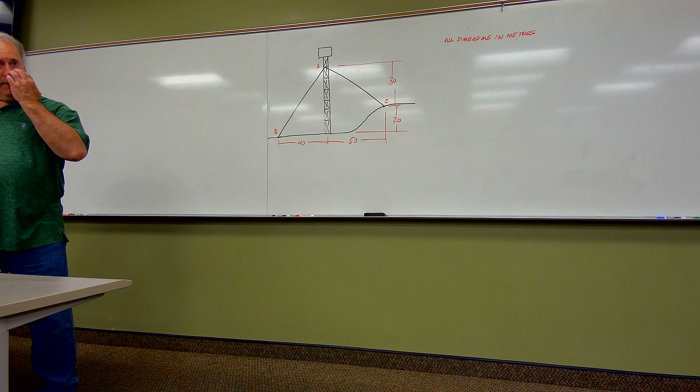And I'll also remind you that right now we're limiting ourselves in our conversations to 2D force systems, which again, if you're going to take some time, I encourage you to do so. Take some time to go through Chapter 2 in your book. Skip your sections involving 3D. There's nothing there that we need to dig into right away.

But when it comes to spending any time in Chapter 2, I want to be crystal clear when I say this. As I said to everybody at the very beginning of the course, the job at hand for all of us in the very few weeks that we really have together for this course is to really get good at some fundamentals, and then the details will come in time. I want to make sure that you all understand that doesn't mean that we shouldn't be looking at the details. It means we don't need to make them part of everything we do.

But if you're going to spend some time going through Chapter 2, I just want to encourage you to not only look for the things that we're covering in class, because those are the fundamentals, obviously, but the depth of knowledge that you get by reading about some of the details, some of the little things that we're not going to cover, because once again, we can't possibly cover everything. So understand that when I suggest going through the chapters, what I'm really saying is invest that time in yourself to get at least some exposure to those details so you can see how they dovetail with the fundamentals that we're covering here in class.

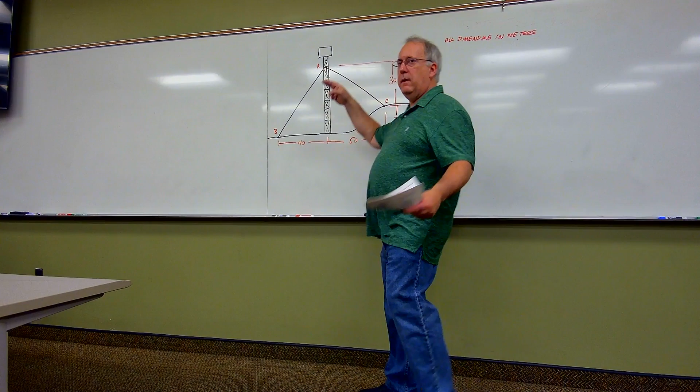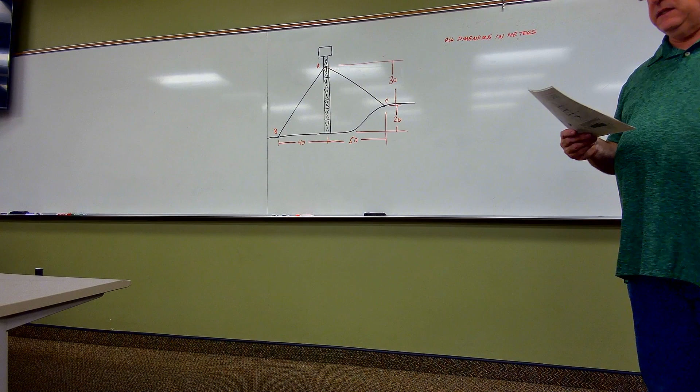The guy cables AB and AC. So we're talking about these two cables right here. I'm 4 words into it and I've stopped. AC, AB. All right, we're talking about the so-called guy cables. The guy cables AB, AC are attached to the top of the transmission tower. Now, hear this word I'm about to emphasize. The tension in cable AB is 8 kilonewtons. Tension. Very important idea here, folks. Cables are among the few things that we're going to look at here in statics that are not rigid body elements.

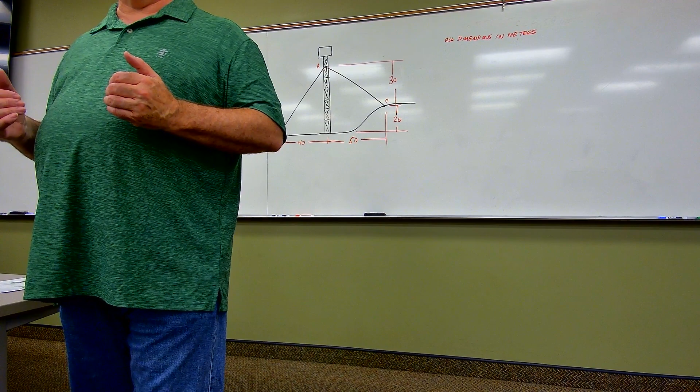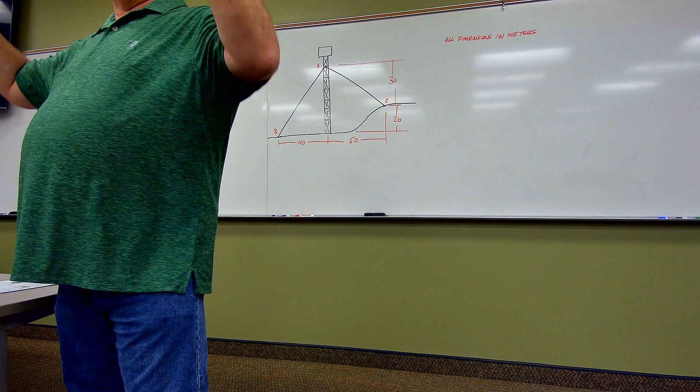All right? Take this tabletop right here, for example. We view the tabletop as a rigid body. I can't compress it. I can't extend it. I can't fold it, I can't make it smile at me, it's a rigid body. On the other hand, if I had a cable attached to the table, or a chain, or a belt, something like that.

Yeah, questions? Is that 8 kilonewtons? Yeah, 8 kilonewtons, yep, 8 kilonewtons.

If I had a cable, so imagine this, I got a chunk of rope in my hand right here. I'm going to attach the rope through this hole in this table right here. Now, y'all know, this is all about imparting forces onto mechanical systems. So, one end of my rope is tied into that hole in that table right there. I'm holding the other end right now, and I want to use this rope to impart a force on the table that's going that way. Can I do it? Nope. Why? Not a rigid body.

So if I really had a rope here, I'm holding it, there's not a whole lot of slack in the rope right here, kind of holding it tight, and I want to use this to push the table that way. All that's going to happen is if I move the rope this way, the rope's just going to do this, and the table does what? Nothing, right? Well, if we want to formalize that idea, what that means is I can't use a non-rigid member to apply a compressive force.

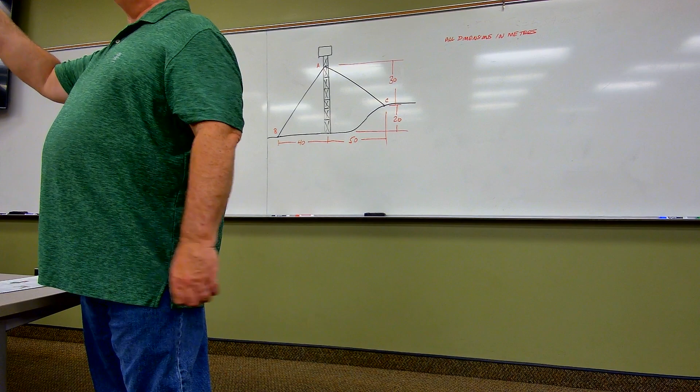I took my same rope right here. I want to compress the table. I want to squeeze it together. I can't take my rope and push down on it and squeeze the table together. No can do. On the other hand, that same rope tied in here, if I want to impart a force that's going to go this way towards that wall over there with my rope, now I can do that. Why? Because in the non-rigid member, I can impart tension forces.

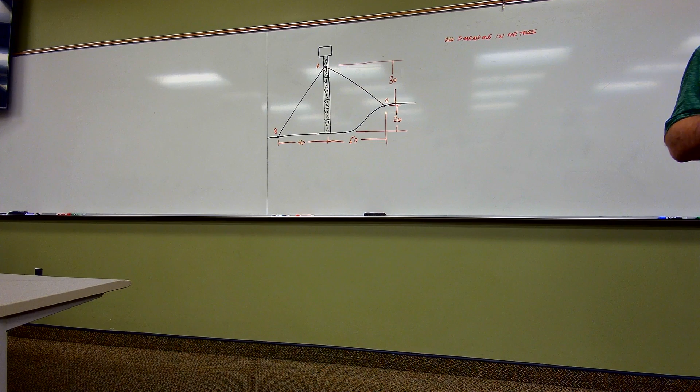If I had an open hand here and I pull on that like there, I face resistance to motion. On the other hand, if I do this, I face no resistance, or effectively no resistance to motion. No compressive forces, but yes, tension forces. So what we just saw in the wording of this narrative, when it said the tension in cable AB is 8 kilonewtons, that is telling us that we're going to treat the cable as a non-rigid body that can only impart tension forces. It can't compress, but it can pull. So the tension in cable AB is 8 kilonewtons.

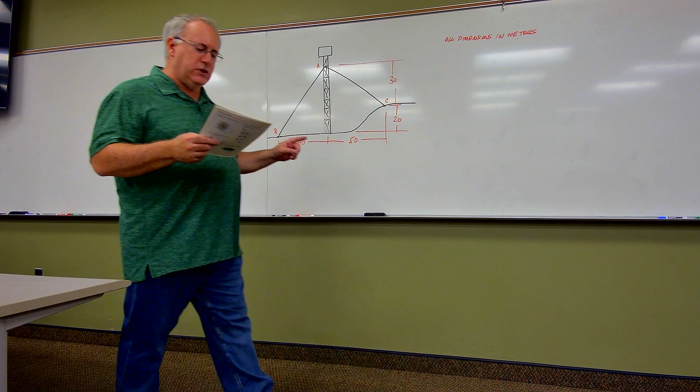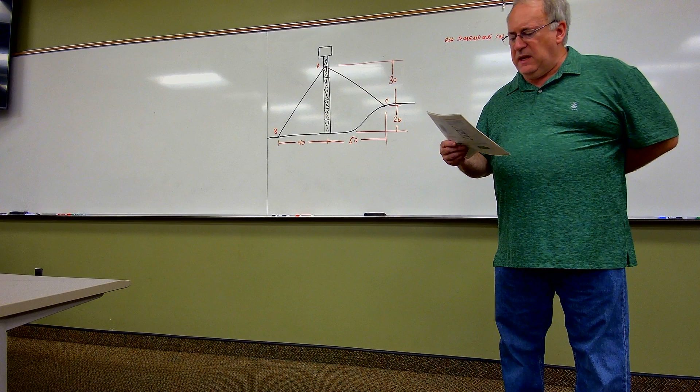The ask in the narrative goes like this: determine the required tension T in cable AC. So we're going to figure out how much tension force we need to put in that cable, such that the net effect, meaning combined effect, of the two cable tensions is a downward force at point A. And then we're asked to determine the magnitude of the resultant of that downward force. So let's break this up and make sure that we're crystal clear, because this part may seem trivial, but it's critical.

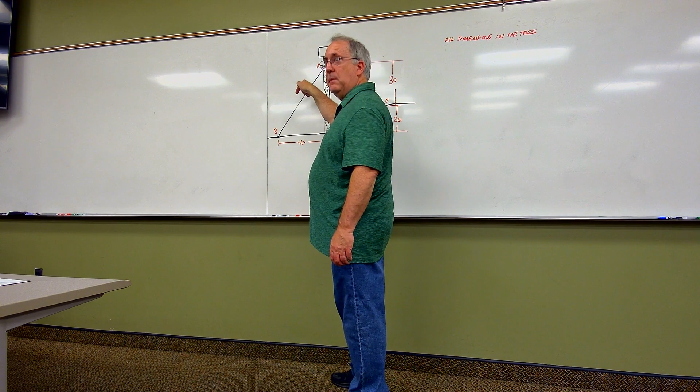We're taking the narrative, we want to understand what we're being asked to do. We know that there's an 8 kilonewton tension in this cable over here. We want to figure out how much tension we're going to get over here so that, I want to read these words one more time, quote, the net effect, the total effect of the two cable tensions is a downward force at point A.

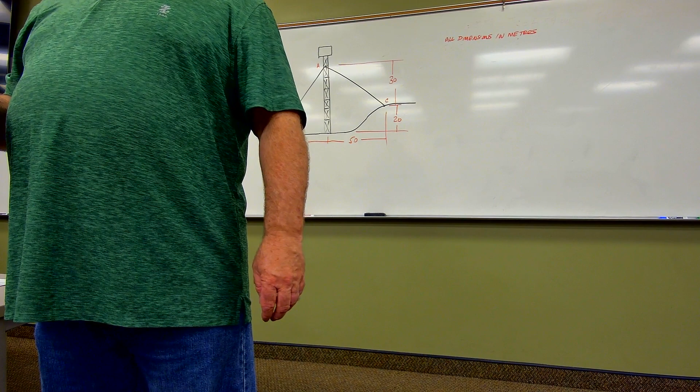What's implied in that is if the net effect is a downward force here, there is no horizontal force. If we think about the standard X-Y axis, we want to put a tension in cable AC so that it creates nothing but a Y direction force and, by extension, no X direction force. That's the key to understanding this problem. That's the key to solving this problem. So, okay, how do we do that? Well, if the game is figuring out what that unknown tension is, again, think about our model. We're going to read the narrative.

If we don't already have a graphic, we're going to create a graphic, but we've got a graphic, so step 1, step 2, done. But now we need to create a model. This also is going to be a visual model that we're going to use to create the math to solve the problem. For us, it's a free body diagram.

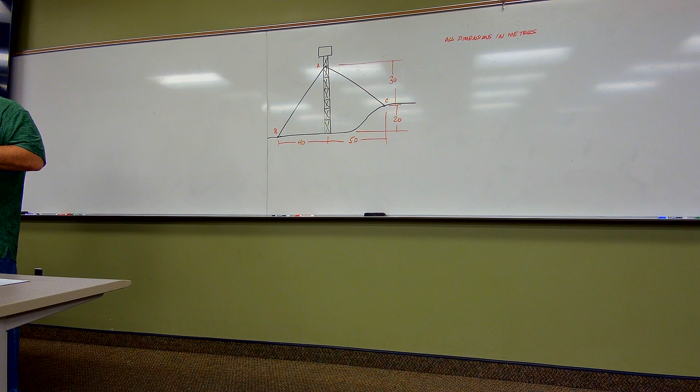Now, we haven't formalized any education yet in free body diagrams, but we've already seen how that's done. We pick something, we sketch that something, and then we draw in forces. If there are any applied forces, we put those there. If there's a weight, we put that there. And then we also include forces for where we used to be in contact with something. We put that there too.

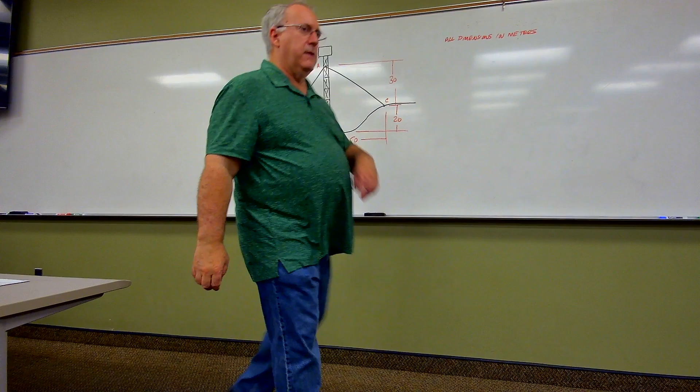So now we're gonna make a free body diagram of something over here. Was there any limitation at all on what you could do a free body diagram of? Like, yeah, you can do it on these things, but you can't do it on that. There wasn't any. There is absolutely nothing that we can't make a free body diagram of. Absolutely nothing.

So take, for example, let's say that I want to do a free body diagram of just a chunk of cable AB. Now, this is not to solve the problem, it's to make a point. Let's say I want to take that chunk right there. Step 1, draw the thing. There's my chunk of cable AB. We already know, according to the narrative of the problem, the cable AB has 8 kilonewtons of force, but we were told that that was a tension force, right?

It's a tension force. Now, as we talked about before, when we don't know the directionality of a force, we don't need to know its direction because the math will tell us what it is. But this is a different scenario. In this case, we know the direction because we're told it is a tension force, meaning the force in this cable is trying to pull this cable apart. It's not trying to compress it. So the 8 kilonewtons of force is going to be collinear with the cable itself.

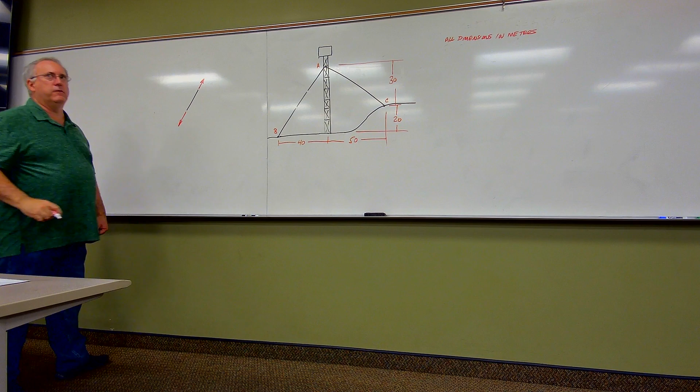This is another aspect of non-rigid bodies like cables and chains and wires. The force will always go along the line of action of the element itself, provided that gravity isn't acting upon it, and we'll talk about that in chapter 3. But for now, we know the forces in this are an 8 kilonewton force going that way. And remember, Newton's law, equal and opposite, so opposite direction down here, 8 kilonewtons going like so. That's the free body diagram of that chunk of cable AB.

So now, let's go back. We still want to solve the problem. We're going to draw a free body diagram of something that's going to allow us to solve this problem. There's a couple of great possibilities. One, maybe I could draw a free body diagram with just these two cables connected together, cut them, and draw my forces associated with the cables. Would that solve the problem? The answer is yeah, that'd do it. But there's an even easier play here yet.

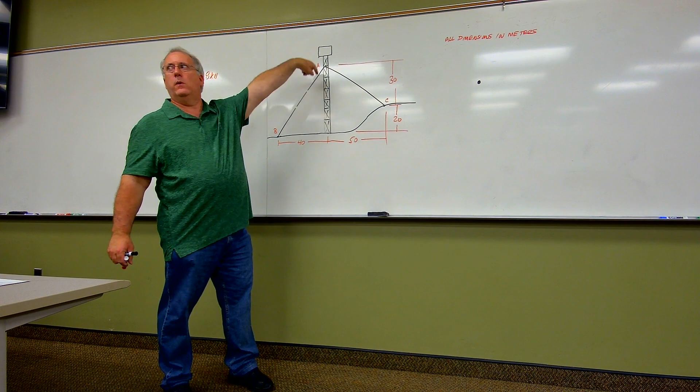If I can draw a free body diagram of anything, then why can't I just draw a free body diagram of the place where these two things are connected together? So my free body diagram is going to have the profoundly complicated artwork of here's where the two cables come together, like that. Now, some might say, isn't that attached to the tower? It is, but that's an attachment going in the Z direction, and our world is 2D right now, so we're not worried about that.

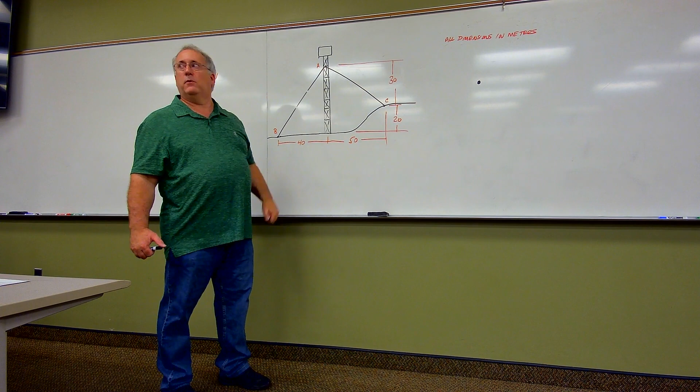But we do know this: coming off of this place where these two cables are connecting together, I have the force in this cable here, and I can draw that force going downward like so. In fact, I know that this is going to be 8 kilonewtons because I've already been told it's 8 kilonewtons.

And why did I draw that arrow down that way? Because, again, equal and opposite. If the cable is in tension and its force here, which ostensibly we could imagine is the place where it's connected to that dot over there, if the force in the cable is going that way, then according to Newton's law, the reaction force has got to be going in the equal and opposite sense. So we did that. Now, cable AC, we don't know the tension in it, right?

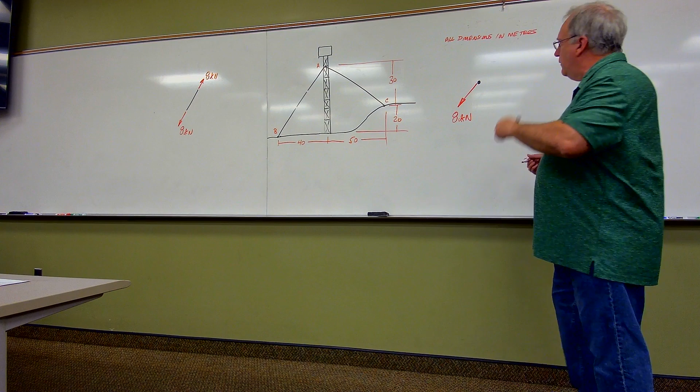But we also know that it's in tension. So therefore, we can draw this force that's going off like so. And let's call that something. Let's call it TAC maybe, for the tension in cable AC. And again, there's no limitation. Call it whatever you want. If you want to just call it AC, perfectly fine. If you want to call it my dog Spot, who cares? Just give it a name.

So now, with that, put this into perspective of how we are solving the problem. Narrative, graphic, now a model from which the math can come from. And in this model, let's not forget, we want to draw an axis system. So how about we do our axis system like this? There's our x-axis, and let's let our y-axis go like that. Does it matter that I drew it that way, folks? Does it make one iota of difference? No, not one bit. I could have just as easily come over here and done something like this and been just as happy with it and got the same result.

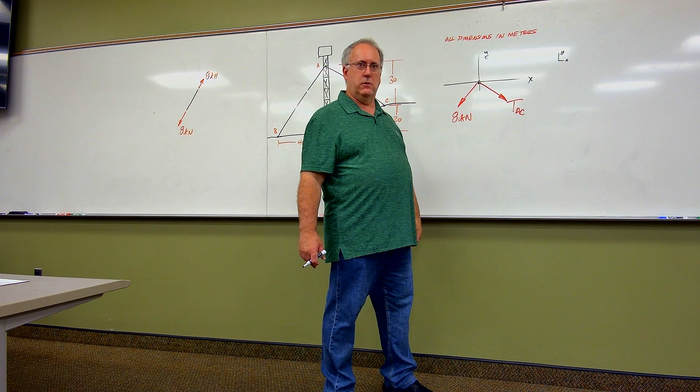But for reasons that will become apparent here in a second, I threw that in right there, because the next thing I need to understand is I'm going to need some kind of directionality. We talked about that the other day. Remember, if I want to be able to specify a force, which is a vector quantity, I need to know how much, direction, and point of application. In this case, the how much are these things, point of application here, and then the direction for a two-dimensional force system, we need one angle, right? So I need to get an angle.

Make sure I draw this thing, okay? I need to get an angle between the x-axis and this force here. I'm gonna call this angle beta. You get an angle between the x-axis and this force over here, and I'll call that alpha. And once again, I can call them whatever the heck I want to. So now I need those angles. If I get those angles, then I've got this thing figured out.

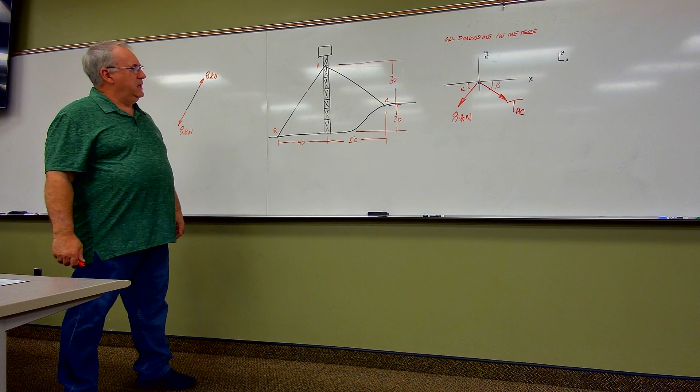To get them, now we're back to our original diagram, the original graphic image of the problem at hand. And remember, we've talked about this before, folks. We look for triangles, right? So for example, if I want to figure out what angle alpha is, I see a triangle right here that I can create, which involves a leg going up like this, a leg going over like this, and here's my angle alpha. Now, let me presume that that is a right triangle. We've got dimensions given to us. This dimension from here to here is 40, which means this leg of the triangle is also 40. This dimension from here up to here must be the combination of this 20 plus this 30, so I got a 50 over here.

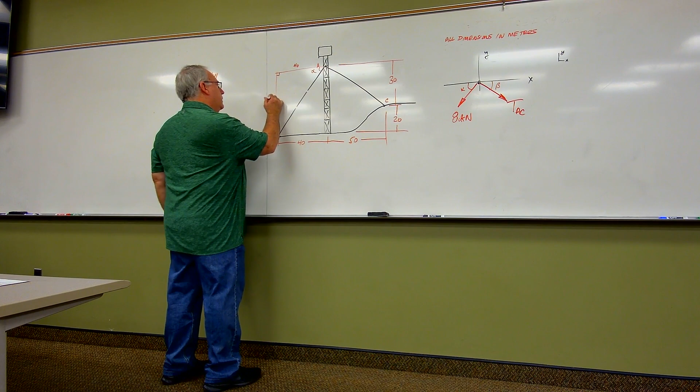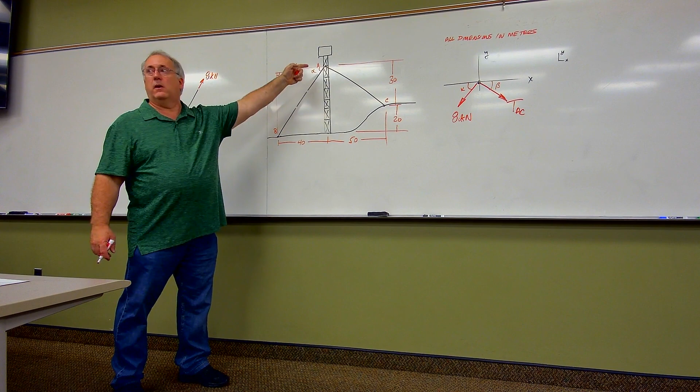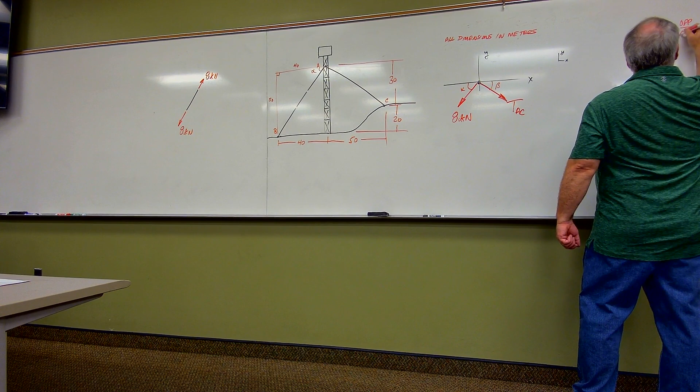And therefore, with respect to the way I define angle alpha, I know the opposite leg of the triangle, I know the adjacent leg of the triangle, and opposite and adjacent, that's tangent, right? So therefore, the tangent of alpha would be opposite over adjacent, and that would be, in this case, 50 divided by 40, which means that alpha would be the inverse tangent of 50 over 40, or 1.25. And folks, if we plug that in and crank that all out, we're going to find out that alpha ends up being 51.34 degrees.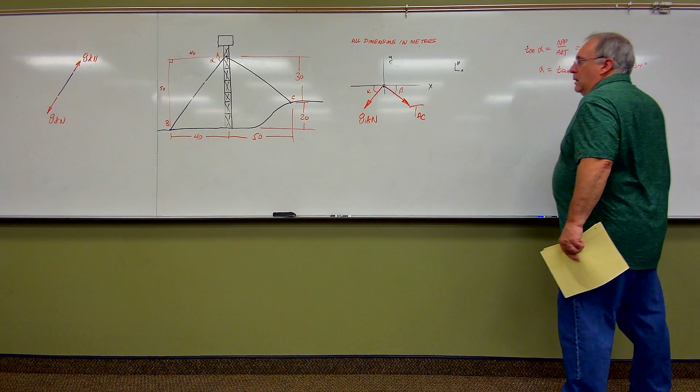And then we got beta to deal with. Now, same thing, look for triangles, right? In this case, easy to see, you've got a triangle right here, going down to here. We know this leg of this triangle is going to be 30. We know that this leg over here is going to be 50. Here's our beta angle. So got opposite, got adjacent. So the tangent of beta, which again is opposite over adjacent, is going to be equal to 30 divided by 50, or 0.6, and therefore beta is the inverse tangent of 0.6. And folks, when you plug that in and crank that out, you're going to find out that beta ends up being about 30.96 degrees.

So now with that, I've got more information that I can add to my diagram that I'm using to get my math. Remember, we've talked about this too. Whenever you know the value of something, make sure that shows up on your model. Anything short of that means you're adding an unknown that is not still really an unknown.

So right now I know that this is 30.96 degrees. And I know my alpha over here is 51.34 degrees. And we are in great shape.

Now, folks, you all know too, as we're going through this, if there's anything that's not crystal clear or that I'm overlooking, don't hesitate. Shout it all out. I assume, since I'm not hearing anything, that everybody's good at the moment, but again, if you got any questions, fire away.

So now where do we go? Well, we've already seen the end. We know that this is all about equations of equilibrium. Summing forces in the x direction, summing forces in the y direction, right? The other day, and even when we were working the problem with the can crusher, we saw the value of resolving forces in their x and y components. I'm going to do the exact same thing here, folks. The next step, now that we've got our model, is I want to resolve my forces. So let's resolve forces. And I can kind of sketch them onto my model over here.

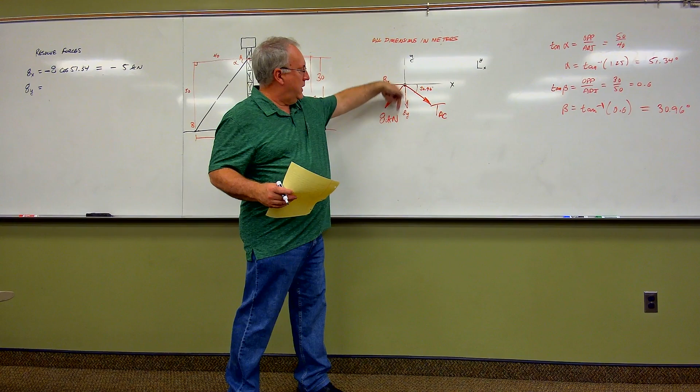Then my B component going down the y direction, y'all take a look at that, make sure we see this. Is that gonna be a positive, or is that gonna be a negative? How many of you are gonna go with negative? Good, all hands should be flying right now, because if that's showing model-wise positive y that way, that's going down that way, it's gonna be negative, so it's gonna be -8 times the sine of our angle, 51.34 here. And folks, we plug that in and crank that one out, we're gonna find that ends up being -6.25 kilonewtons, and we got that one knocked out.

Let's also resolve TAC. So TAC is going to have an x component going off this way. So there's TAC, we'll call this one TAC sub x. And a y component, it's tending towards negative here, so down going that way, so call that one TAC sub y.

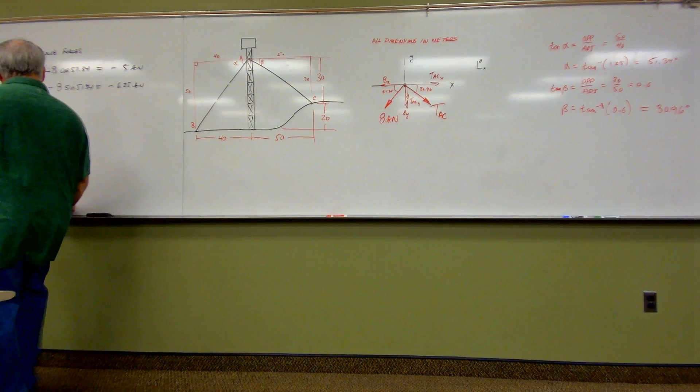So over here, TAC sub X is going to be, and once again, see the triangle here, folks. Can't say this enough. So here's our triangle going down like this. We're looking for that leg right there, TAC sub X. So I've got the hypotenuse, my angle, that's the adjacent, so it's going to be the hypotenuse times the cosine of 30.96. So TACX is going to be TAC cosine 30.96.

Since I don't know what TAC is, that's as far as I can go with that. TACY, and by the way, that TACX was tending towards positive X, so therefore it's a positive number. But TACY, as we all should be able to see, is tending towards negative here, so that's going to be minus again. So that's going to be equal to minus TAC times, in this case, the sine of 30.96.

And then, just like that, now we've got our forces resolved into our X and Y components. And what's important here is this puts us in position now to solve the problem. If you think about the sequence we just did: narrative, graphic, model, from which the math comes. We're in the middle of the math part right now. Now let's solve the problem. In this case, we just have to understand what was being asked of us.

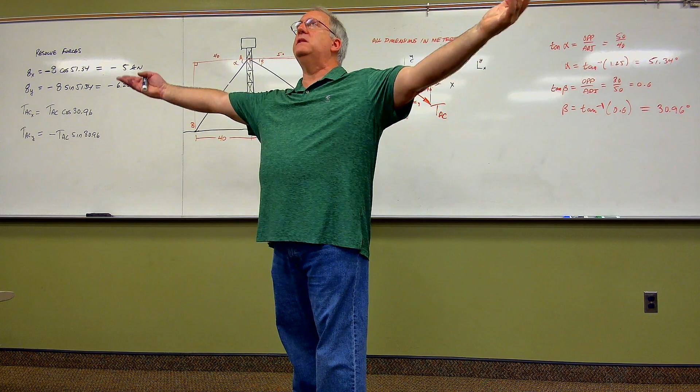What was being asked was that we were going to figure out what TAC was going to be, such that the net effect, in other words, the total effect, was going to be a downward force here at point A. But we said that also meant there would be no force in the X direction. So if there's no force in the X direction, then what's the value of that force? 0. So we sum up forces now in the X direction, which I'm going to do way over here.

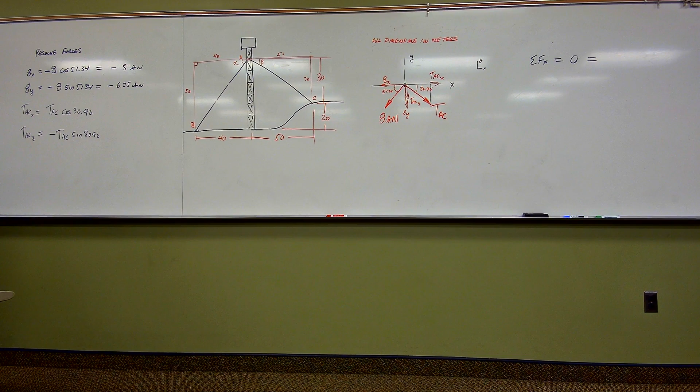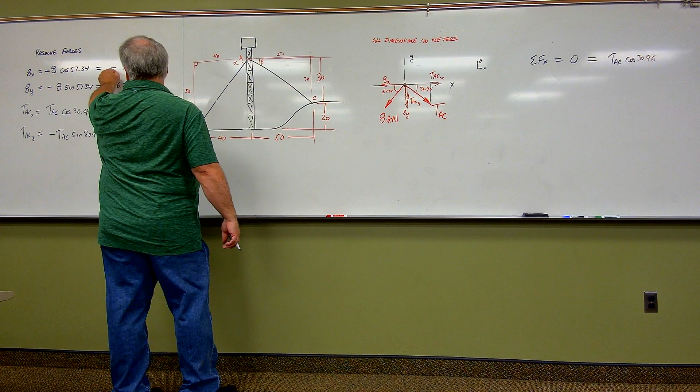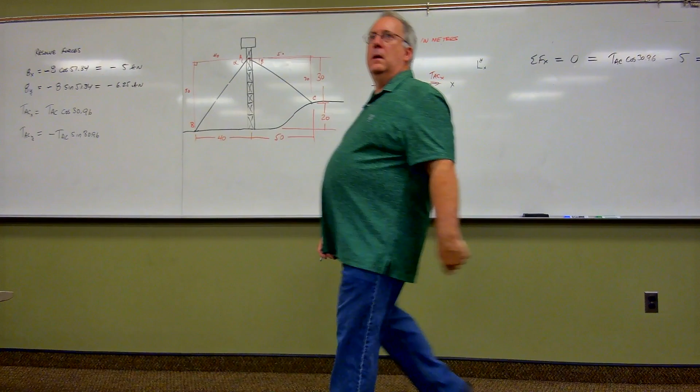If we now sum forces in the X direction, we want that sum to be equal to 0. And from our resolved forces, remember, forces that are collinear merely add together. So the X forces can be added up. So TAC cosine 30.96, that's one of the forces, plus this one up here, but that's a minus, so minus 5, is equal to 0. One equation with one unknown.

That's solvable. So now if we just do the algebra, if we slide that -5 over to the other side of the equal sign, it becomes a positive 5. It turns out that TAC is going to be equal to 5 divided by the cosine of 30.96. Folks, plug that in and crank that out, and you're going to find out that TAC ends up being 5.83 kilonewtons.

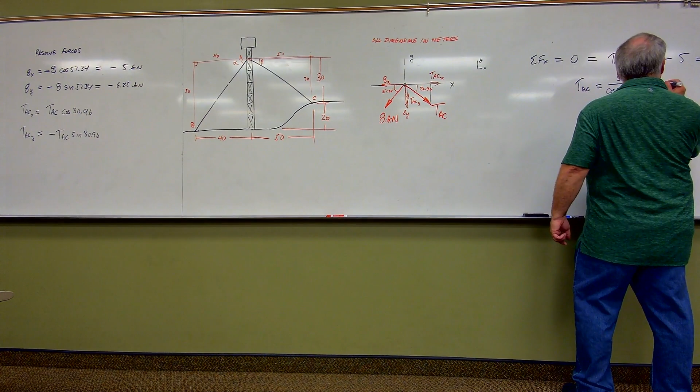So just like that, the first part of this problem has been answered. Remember, the problem wanted to know how much tension we needed to put in cable AC in order to cause the net effect to be nothing but a downward force. We've done that. By setting it at 5.83 kilonewtons, we are assuring that the total force in the X direction is 0. The last part was simply, what is now the resultant of the forces of the two cables?

Now, the resultant becomes the single force that represents an equivalent system for these two forces right here. But if the only force is going to be purely downward, then all we need to get the resultant is to sum up the y forces. So the resultant is the sum of the forces in the y direction: negative 6.25, which we already calculated, and then minus TAC sine of 30.96.

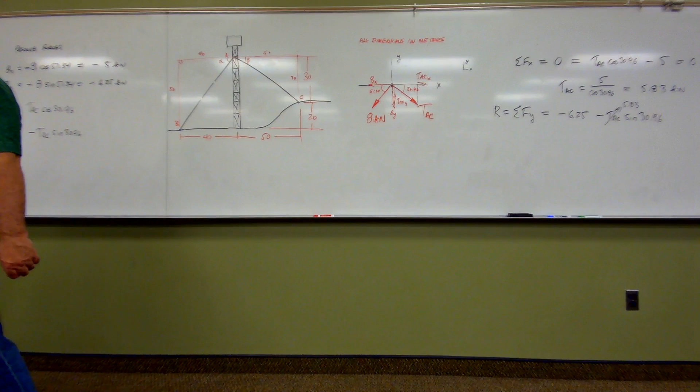And we've already determined that TAC was 5.83 kilonewtons, so let's just replace that, since it's a known. And folks, if we take negative 6.25 and subtract from it 5.83 times the sine of 30.96, it turns out that our resultant force ends up being equal to minus 9.25 kilonewtons. And that solves the problem.

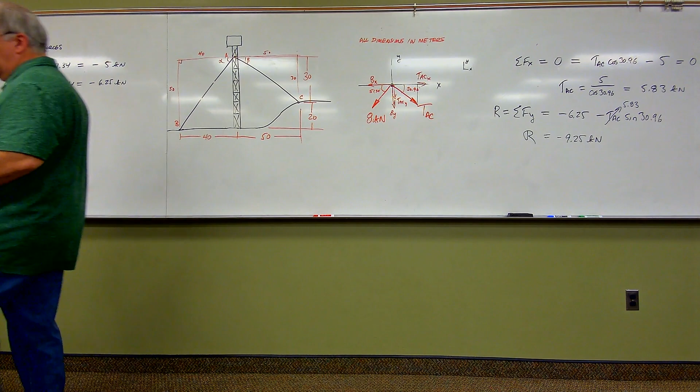That, folks, is fundamental equilibrium. That's all there is to it. There's not a lot to this, folks. Fundamental equilibrium is basically just utilizing the idea that in a static system, forces have to add to zero.

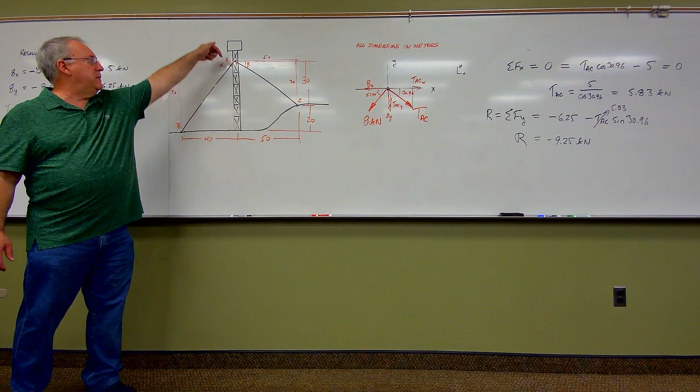Now, in this case here, you might say, but the resultant was not zero. You're 100% right. If there wasn't something holding this tower up, if we had nothing but 9.25 kilonewtons pulling down on this tower, what would happen? No, it'd go down like this, right? But that's not the case. Something's holding the tower up, happens to be the ground. Anybody want to take a wild stab at what the upward force would be here that's resisting the downward force on this, that's balancing this out?

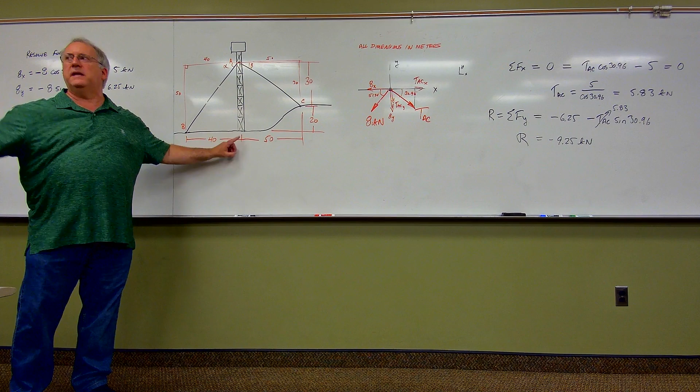Oh, I love it. Yeah, that's the voice of common sense. Man, if it's 9.25 pushing down, it's got to be what? 9.25 pushing back up, right? It all makes sense the more you think about it. But we're all making that happen because of, again, utilizing equilibrium.

And as we're starting to see here, and we're going to see it in much, much more detail as we go along, this habit of I'm going to understand the narrative, I'm going to look for the buzzwords because they're going to tell me what I need to know, and we're going to see a lot of them still to come. I'm going to use that in a graphic representation. I need to turn those words into a picture and thankful for every time it's already given to me.

But from that, the model that we're going to get the math from, which is a free body diagram, and then the math takes us to the same place every time. You'll get so tired of hearing me say it, but you're going to realize as we go along, yeah, that always is the pathway every time. Any questions about this one, anybody? How we did it?

Sweet. Okay. Now, let me move on just a hair here. So if there's no questions on that, now I told you at the beginning of this, we're going to move on to something new and very important. Let me clean up the whiteboard here.

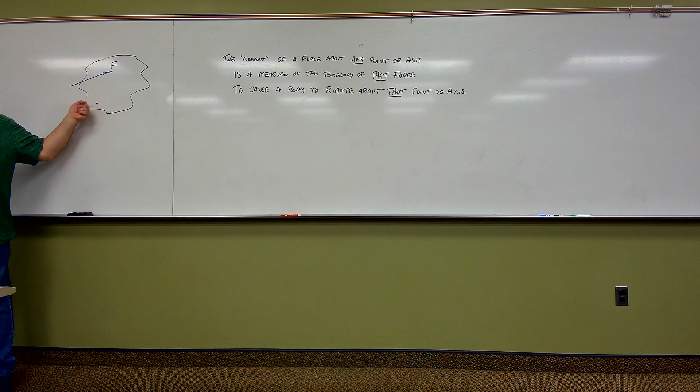So here's my point. In reality, the x-axis goes that way, the y-axis goes that way, and the z-axis in the real world is coming towards you. So when we see a point, what we're actually seeing is the 2D representation of the axis. That leads to something important later on in mechanics, the notion being that moments, and by extension what we better know as torques, are axial phenomena.

Take a motor, for example. When a motor rotates, it's rotating on an axis. If I drew the end of the motor and drew the axis as merely a point, I would see the rotation about that point. But in reality, it's rotating about an axis within the motor. Same thing going on here. So the moment of a force about any point or axis is a measure of the tendency of that force to cause a body to rotate, importantly, about that point or axis.

So the moment about that point right here, due to that force, is going to be different than the moment that that force causes about this point right here, or this point right here. It's always the force with respect to the where. About what point or about what axis are we talking about? Okay, that part is profoundly important.

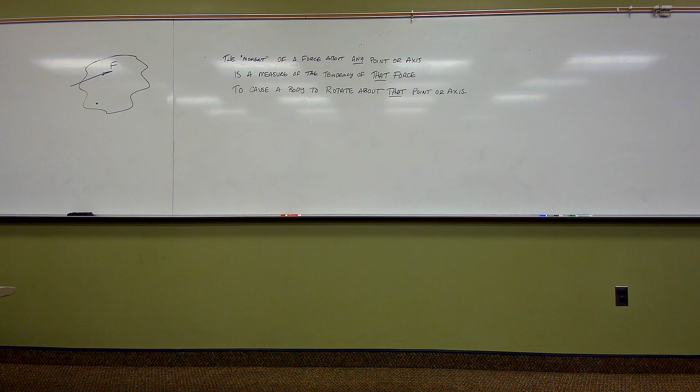It's important for us to know too that moments, just like forces, are vector quantities. So they have magnitude, they've got application location, but they've also got directionality. And we've already asserted that directionality thing, but I'm going to remind you of what that is. For all moments, let me write it this way, a moment.

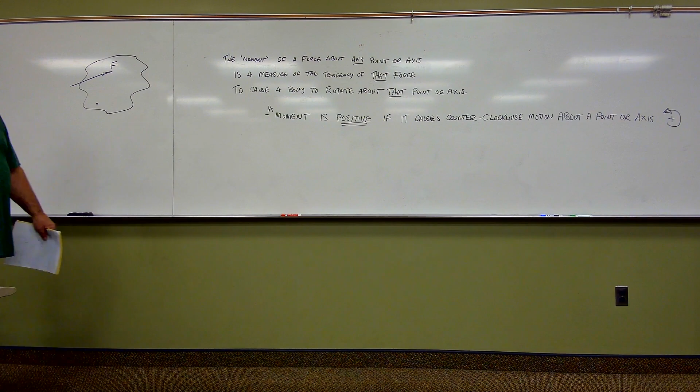A moment is positive if it causes counterclockwise rotation. I wrote motion, that should be rotation. About a point or an axis. And then by what should be obvious extension, and I won't rewrite all the wording, but negative if it causes clockwise rotation.

So here, if my force tends to cause counterclockwise rotation, we call that positive. On the other hand, if my force causes clockwise rotation, like that, we know of that as being a negative moment. So as I look at this force right here, and this is a very important point I'm about to make with y'all folks, if the moment that I'm interested in is about that point right there,

think about this point as being like, let's say I stuck a pin in this blob, and I put a force on this blob system right here, yet it's pinned right here. That would cause the blob itself to rotate about the pin here in a clockwise sense, right? Because it's clockwise, that moment would be negative.

But check this out, the exact same force, no difference in the force whatsoever. If I contemplated the moment that this force now causes about this point right here, let's say I put a pin in that right there, I apply a force here, now my blob would rotate about this pin in a counterclockwise sense. So you see, that would be a positive moment. Same force can cause a negative moment in one case and a positive moment in the other case.

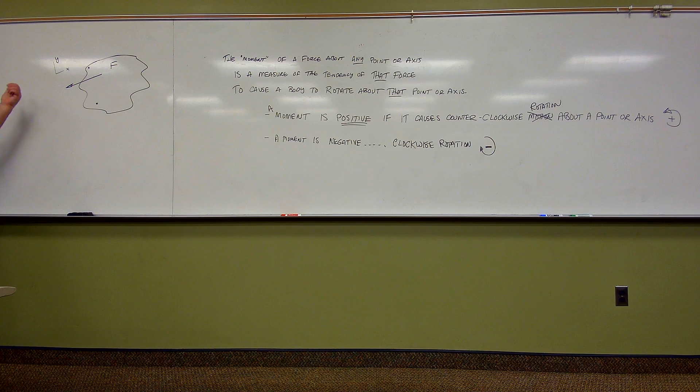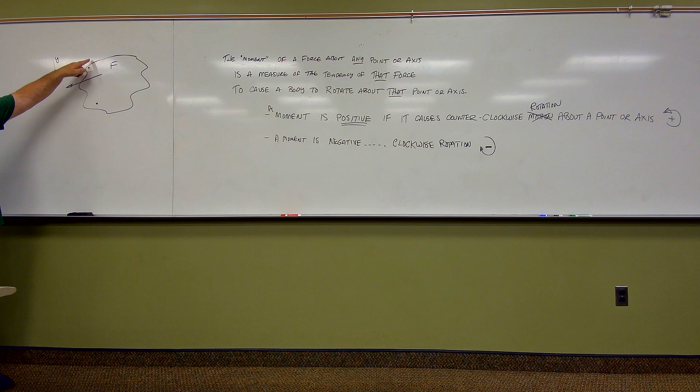In the same vein, if this force was going this way, and I've seen this mistake made so many times, folks, somebody might look at that and say, oh, that's a negative force, so my moment's going to be negative because the force is negative. Nope. In this case, this negative direction force is causing a clockwise rotation here, so negative about that point, but down here, that's causing a counterclockwise rotation, so it'd be positive about that point.

It makes no difference if the force was positive or negative, none whatsoever. What did make a difference is what's the direction of rotation.

So when it gets to the positive x and y axis, it's going up, right? Like, that's kind of... I'm not following. Help me understand that. So I think you're on something interesting, but... Okay, so when you get to like between the 3 and the 12 o'clock position, and it's going up, the value is increasing as you go along there. If it's counterclockwise, it's the opposite. Yeah, that's an interesting take on that. I need to work the math out in my head, but that's an interesting take. Yeah, good stuff.

Now, what have you guys noticed? Is it me or is the HVAC system in here total shit today? Today there's supposed to be a heat stroke. There's a heat stroke warning out right now. I'd say we should be looking for a heat stroke watch in this room right now. It seems nasty.

I always thought this is kind of funny. We're supposed to be one of the premier engineering schools on the planet, and you'd think we'd be able to pull off the miracle of a working HVAC system. We are currently about 106 years old, and guess what? We've never had in 106 years a working HVAC system. So, love it. Okay, so I'll tell you what. I treat that as actually good news because I'm not going to keep us here forever. This place is starting to burn alive.

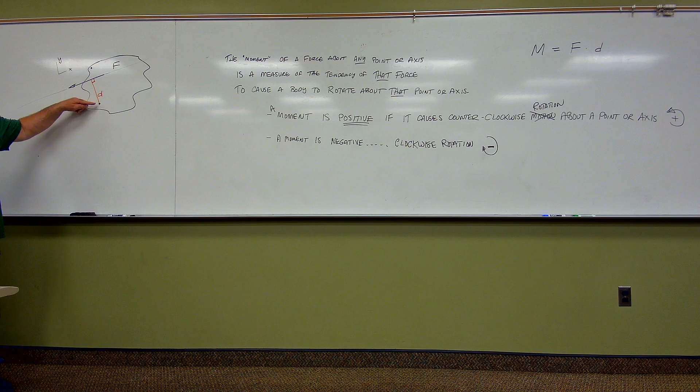You're thinking, oh my gosh, how can I possibly ever screw that one up? Trust me, here's how you're going to do it. You're going to be given a distance, like let's say the distance between here and right here. You're going to say, oh, I know my distance, it's that line right there. No, it's not. It's the shortest line. It's got to always make a 90-degree angle. Trust me, it's easy to get fooled into thinking it's something other than that, but it's not.

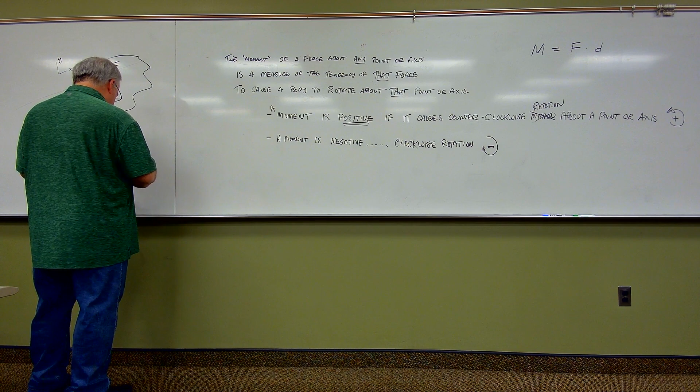Questions on that? Let's see an example, and then maybe we're close enough to getting out of here. This won't take long.

Simple enough, folks. I've got a bracket sitting here. The bracket, as y'all can see, is a curved bracket. Although my artwork is not demonstrating it perfectly, it's meant to be a perfect quarter circle. So I got a quarter circle bracket going up like so. I got a point A down here. I got a 250-pound force that's being applied. I want to point out that if we contemplated a traditional X and Y axis right here, that is a purely negative Y direction force.

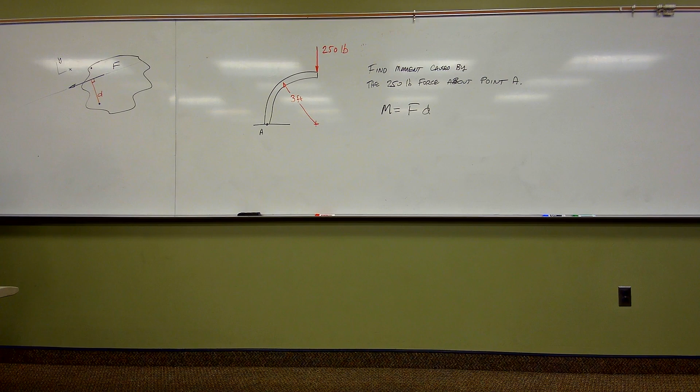Well, folks, this one is as straightforward as it gets. If we just remember that the magnitude of the moment, by definition, is nothing more than force times distance. Right now, if I ask you all, what is the magnitude of that force? I don't need to see a show of hands, but I wouldn't mind having it. How many of you would tell me that the magnitude of that force is minus 250 pounds? Good. It's not. The magnitude's 250, right? The mere fact that it's pointing in the negative Y direction, who cares? The magnitude is 250. So right now I know that my value of F is 250.

How about my value of D? Well, if my moment center here is going to be about point A, this is the point of interest, therefore it's the moment center. If I extend the line of action of this force forever in both directions, it goes down through here, it goes up this way like so. The distance that I need is the distance from point A over to the line of action such that that distance causes a 90-degree angle. That's what I need.

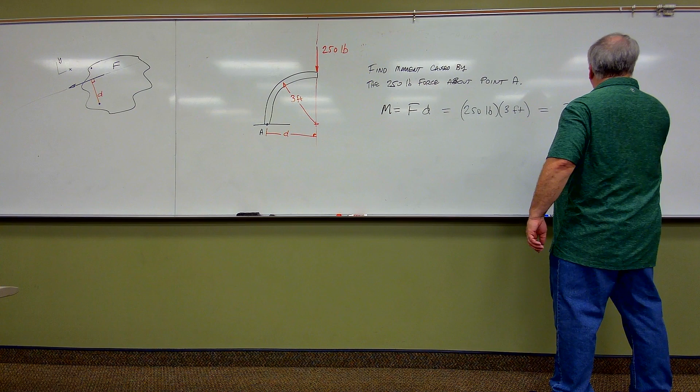And in this case, because we were given, and again, this is meant to be a quarter circle, and we're given its radius, then the distance from the center up to right there is 3 feet, and the distance from the center to right there, A, is 3 feet. So it turns out, folks, super simple here, that this is going to be our force, which is 250 pounds, times the distance, which is 3 feet. And if we plug that in and crank that out, 3 times 250 is 750. So I'm gonna get 750 foot-pounds of moment. Am I done now?

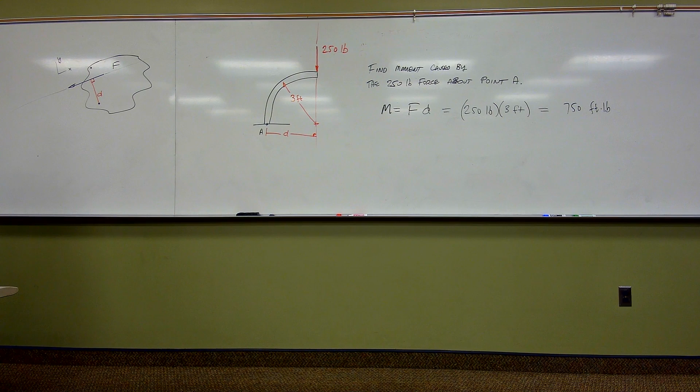Did I specify the moment? Well, I specified the moment's magnitude. I know that the magnitude is 750, but a moment is a vector quantity. So I know the magnitude. I know where it is located, in this case about point A. What about the directionality, folks? I want you all to study this and think through this. Is that force causing a clockwise rotation about A, or is it causing a counterclockwise rotation about A? Get it in your mind what you think it is.

It's clockwise. Now, how do I know that? Well, if I think about the line of action of this force going this way, and if I think about this being my anchor point, if this was a pin, and I really did push down on this curved member like this, the curved member is going to rotate this way about the pin, right? So that's going to be clockwise. That's one way to see it.

If, as you looked at that, you're like, I'm not really sure, is it clockwise or counterclockwise? Okay, key point. You've got to get sure. Before too much more time, we've got to very quickly be sure of this, because uncertainty about clockwise versus counterclockwise is going to really mess things up in no time flat. So if it doesn't resonate with you, there's a couple of other tricks you can use.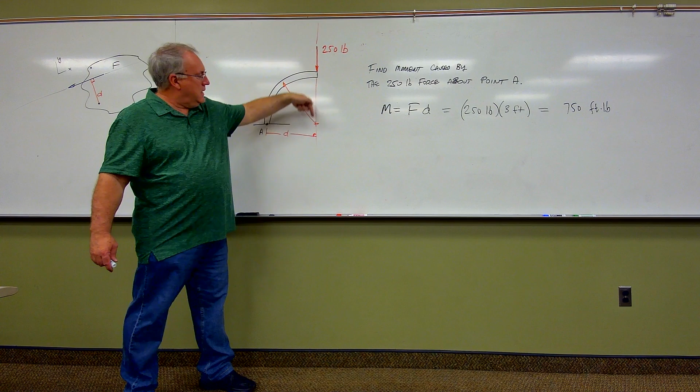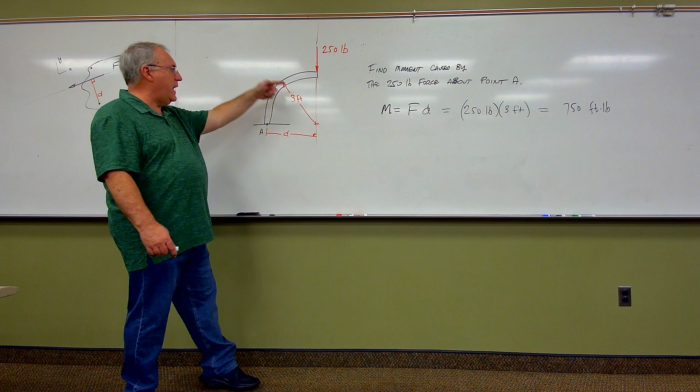One, remember you can slide a force anywhere you want on its line of action. So imagine you slid this force down here, right where my finger's at. If I then tied a string from this point to my arrow here and I let the arrow fly, that string is going to constrain the arrow and it's going to make it wind around A in the clockwise direction. That might help you see it.

Please hear me though when I say this. After a few tries of this, if you personally are still having trouble seeing how the rotation goes, stop and see me and just let me help you see that. You don't want to be a week from now and still be like, I don't see it as clockwise or counterclockwise. You don't want to be there, folks.

So now, because this one here causes a clockwise rotation, our directionality is clockwise is negative, right? So when we complete this, we need to do one of two things. You either put a negative sign in here to note that that is a negative moment, or you can write this as 750 foot-pounds followed by the letters CW. CW meaning clockwise, CCW meaning counterclockwise. That is a way to do it.

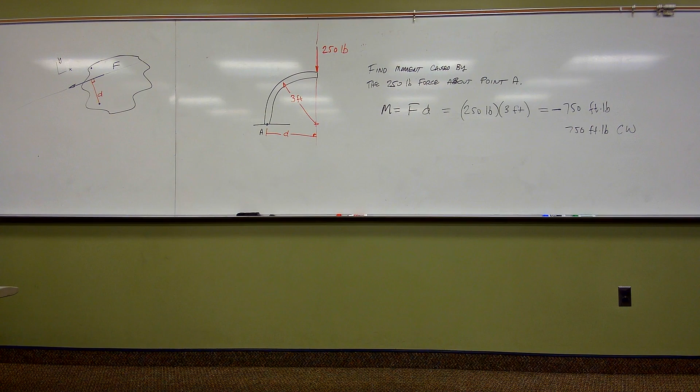In fact, in the book, and the answers in the back of the book, you'll see that they use the CW, CCW notation all the time. So make sure y'all understand what that is. CW, negative, whatever, we need to see that as clockwise versus counterclockwise. Anybody have any questions on how we just did that?

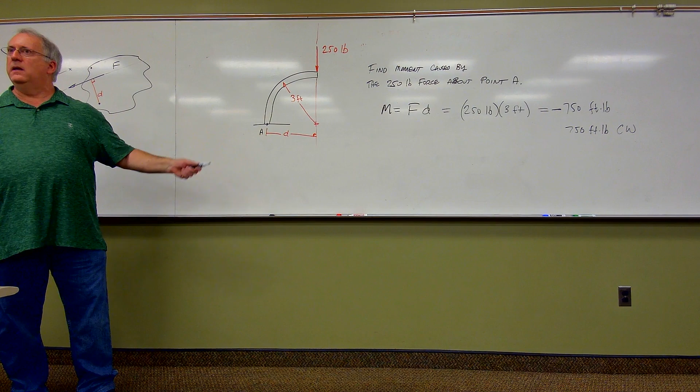I'm going to show you one more, then we're going to be out of here. But this sets up a really important conversation on Thursday, and I mean really important. So let's check this out. Let's imagine that we've got a simple circular drum. I'm just going to show the end of the drum, so it looks like a circle. Let's say the center of that circle is right there, and I've got a force sitting up here at the very top.

In fact, let's let our y-axis go right through there. There's our y-axis, here's our x-axis. Let's say that I've got a force sitting up here that is 100 pounds going in that direction, making a 30-degree angle with respect to the y-axis. Let's call the center of the circle point O. I want to find the moment about point O, and of course I'm talking about the moment caused by that force right there.

In the there's nothing new here department, we already know that the magnitude of the moment is equal to the force times the distance. The magnitude of that force is 100, obviously, so we got the F part down. Distance, different animal. Oh, I forgot to add one thing. Let's let the radius of this drum be 12 inches. So if my force is 100 pounds and I use 12 inches for my distance, am I right or wrong? And everybody says, wrong.

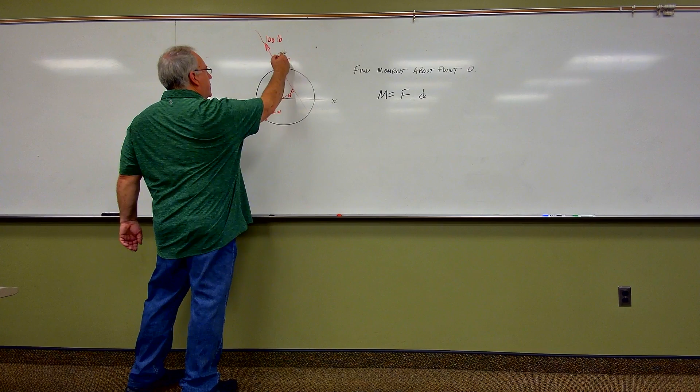Why? Because the distance we're looking for is, if I extend my line of action forever both ways, the distance between my moment center and the line of action of my force that makes a 90-degree angle. No problem here: I'm going to call this distance D. We're always looking for triangles. If this is a 30-degree angle, then according to geometry, that's also a 30-degree angle. I see a right triangle with a leg equal to my radius, 12, as the hypotenuse, and D opposite the 30-degree angle, so opposite over hypotenuse, sine.

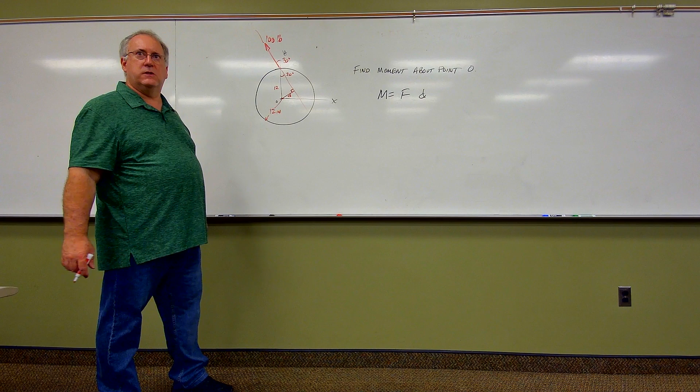So the sine of 30 is equal to D divided by the hypotenuse 12, or D is equal to 12 times the sine of 30, and the sine of 30 is 1/2, or 0.5, therefore D is equal to 6 inches. With that simple step, now we can say the moment is equal to the magnitude of my force, 100 pounds, times my distance, which we just calculated to be 6 inches.

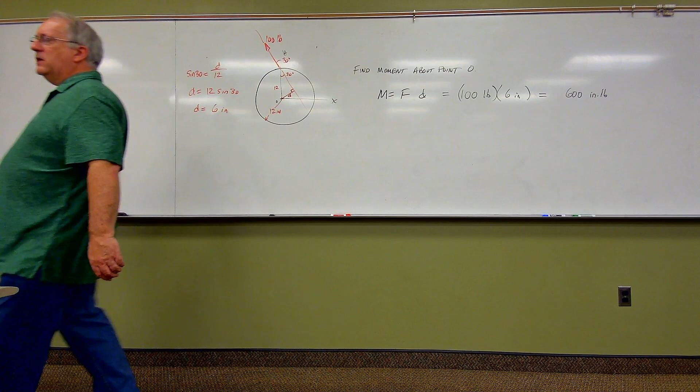And if I plug that in and crank that out, I'm going to get 600. The units on this are going to be inch pounds. And I'm not done, though, until I specify, is this causing a clockwise or a counterclockwise rotation about this point right here? Is this force here going to cause counterclockwise rotation or clockwise rotation?

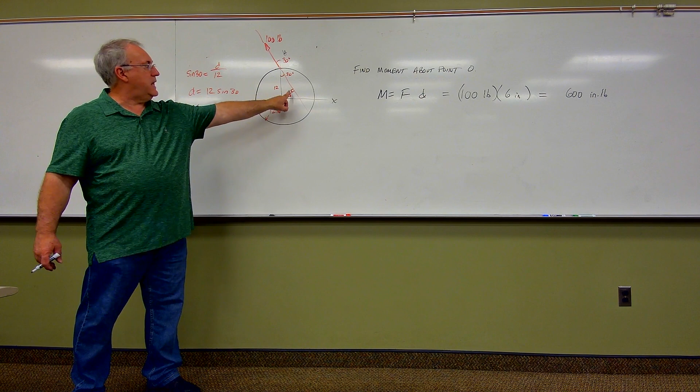Counter. Everybody needs to see that. And if you don't see it, slide the force down. Imagine there's a pin through here and put a force on this that's going to cause the wheel to rotate in a counterclockwise sense, or tie a string to the arrow, whatever it is. So because that is counterclockwise, that makes this a positive moment. Therefore, you could end this off by maybe just writing CCW, or a plus behind it or in front of it would be perfectly fine too.

So two really fast ways of getting moments. They both relied on an ultra simple step, force times distance. When we get together again on Thursday, I'm going to work a problem for you that's going to look something like what I'm just going to sketch here ultra fast. I'm going to work a problem in which we're going to contemplate force applied to an end of a basketball hoop. And we're going to want to figure out what is the moment that force causes about a point right there and about a point right here.

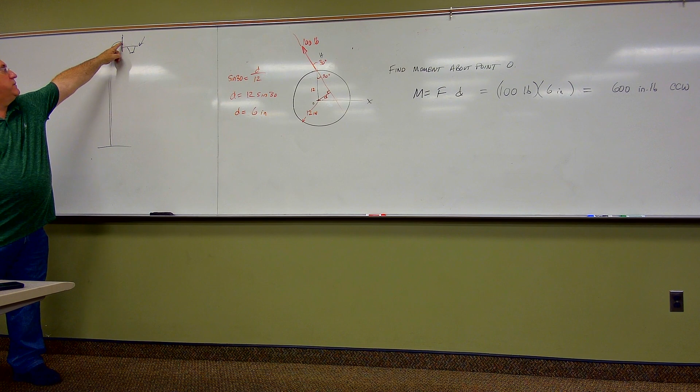Here's what I want you to plant in your minds. If I had to figure out, by extending this force down here, what the distance is from this point to here, I probably don't have enough information in the problem to do that. As you're going to see, it's enough of a total pain in the butt with the information that's going to be given in this problem just to figure out the trigonometry, to figure the distance from here down to the line of action of that force.

That means that while the first couple of examples we just saw here for calculating moments were easy and straightforward, we're going to move away from easy and straightforward to something nasty really fast. So the question becomes, what can we put in the toolbox that'll take a problem like this and make that doable without spending until our next birthday waiting for the trigonometry to work itself out? The answer is, there is something remarkably important called Varignon's theorem. And I'm going to give you the highlights of Varignon's theorem.

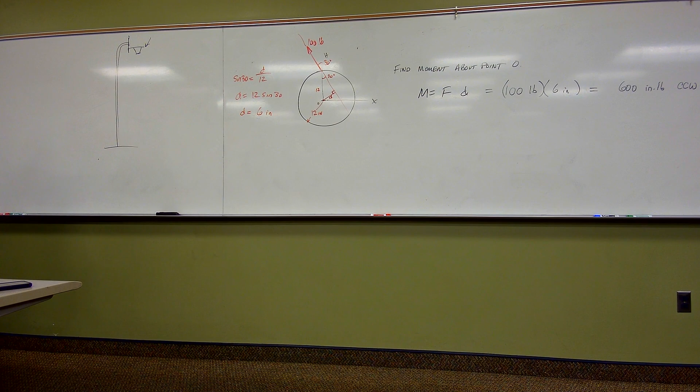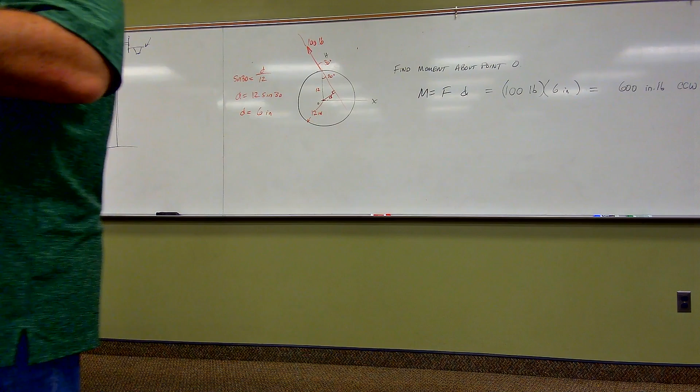Varignon's theorem simply says, if I have a force and I want to know the moment that that force creates about any point, then if I can create an equivalent force system, then the moment caused by the equivalent force system must be the same as the moment caused by the original force system. And why is that true? Because remember, equivalent systems have the same effect on mechanical systems.

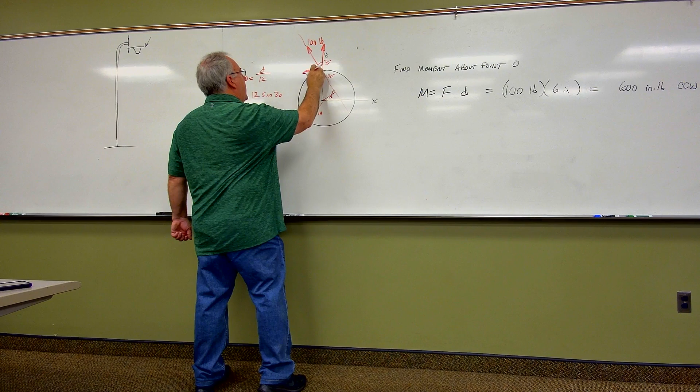So what we're about to find out is this. If I take this force up here, and once again, if I create an equivalent system by resolving it into its y component and its x component, I know that when I do that, I get rid of the original force, but now I got this force and this force. If I want to figure out the moment about this point right here, is it not true that the line of action of this force goes right through that moment center? If that's the case, then what's the value of D? 0. This force doesn't even come into play.

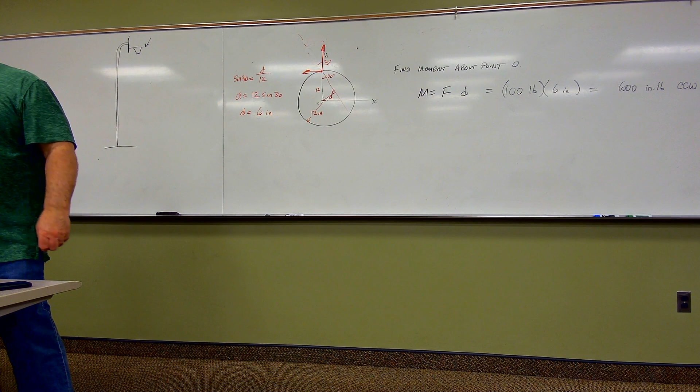But this force here, that force has a finite distance from the moment center. That force right there, by the way, would actually have been our 100 times the sine of 30, so that would be 50 pounds right here. That 50 pounds has a moment arm given by the original dimension of 12. 50 times 12 is 600. Didn't we get 600 over there? That's Varignon's theorem in 30 seconds. We're going to formalize that. We're going to see how we're going to use that to make a problem like this go from impossible to quite doable. We'll do that on Thursday.